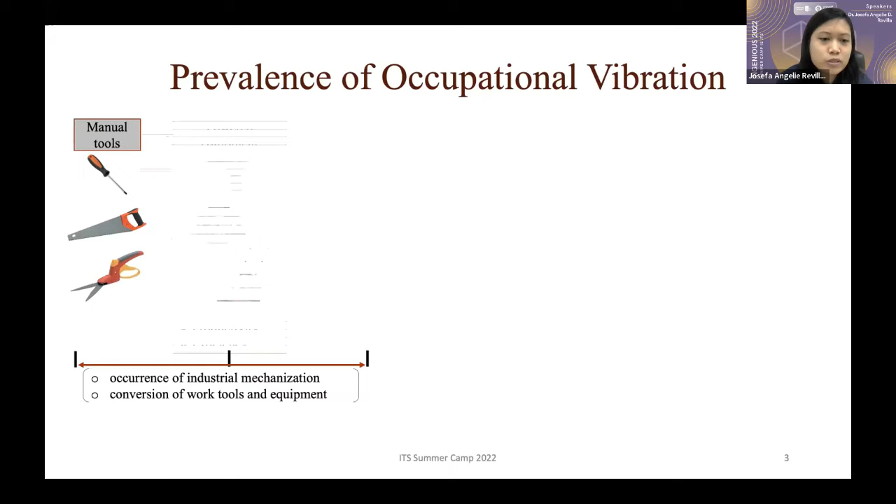We all know that in the early days, we were all using manual tools. However, due to industrial mechanization, these manual tools have been converted to mechanized or powered equipment, primarily because we want to improve productivity and efficiency.

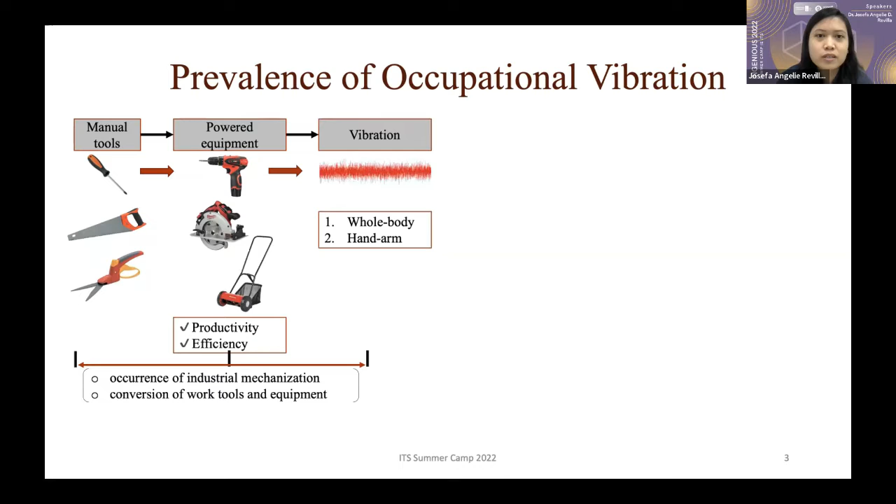This is not just present in the agricultural sector. This can also be observed, and is very prevalent even in the manufacturing industry. However, these powered tools create vibration that can be transmitted through your whole body or to the hand-arm system. So my focus will be on the hand-arm system.

The amount of transmitted vibration is not just influenced by the characteristics of the vibration source, it is equally influenced by the hand-arm biomechanics of the operator, meaning how strong you grip the handle, what posture you are imposing, something like that. And in the long term, continuous exposure to high levels of vibration...

Given the extreme grip exertion and awkward posture, these can all lead to what we call hand-arm vibration syndrome. This can affect peripheral neuropathy, or can lead to peripheral neuropathy, musculoskeletal disorder, and vasoconstriction.

My main focus will be on the musculoskeletal disorder. These can lead to permanent disabilities. So the critical stage when assessing the effect of vibration will be on the onset, or during the short-term exposure.

So in the succeeding presentation, you can see that our focus will be on the short-term exposure to hand-arm vibration, because we consider that this is the critical stage wherein we should be able to determine or discover the onset of HAV symptoms.

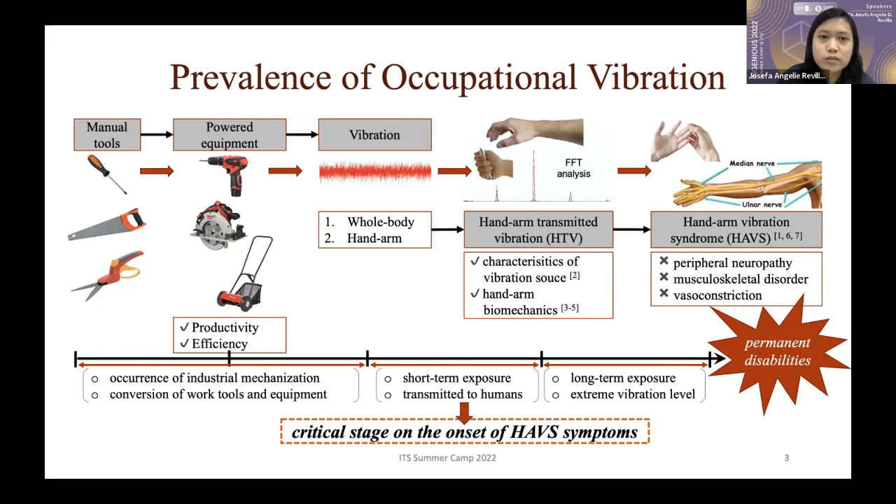Okay, so occupational vibration here in the Philippines. Agriculture is one of the main sources of livelihood here in the Philippines. In fact, 25 to 30% of the labor force is under this agricultural subsector. 17% of the 30 million hectare land area are arable land used for farming.

And one of the top agricultural commodities is rice. When planting or farming rice, usually the farmers need to first prepare the land. As you can see in the picture here, you first need to prepare the land before you can actually plant the rice or the seeds.

Let me show you how land preparation is being conducted. Before that, let me inform you that one of the main agricultural machinery being used to prepare the land for farming is the hand tractor. So this is an example of a hand tractor.

This is usually pushed forward at a slow pace. Sometimes it can be lifted or pushed downward depending on the quality of the soil. So let me show you a short video clip on how a hand tractor is being operated.

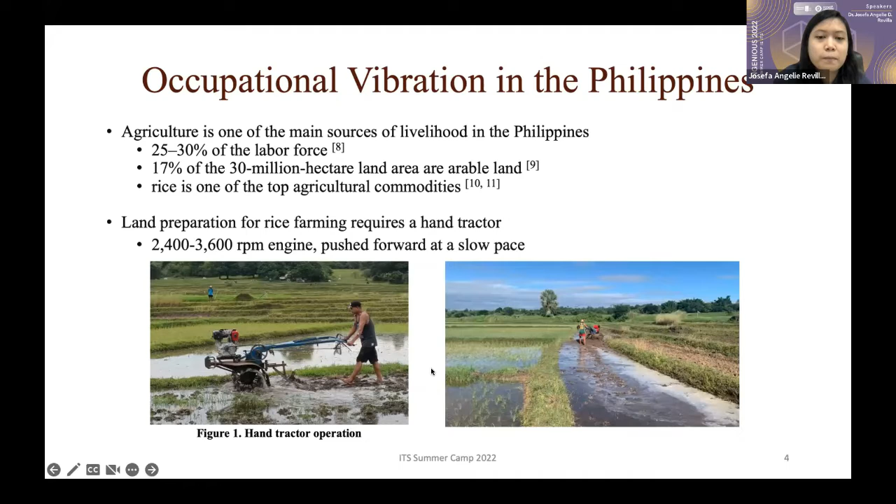Now here are some of the research that we have conducted here in the department that relate to transmitted vibration in physiological responses. As I mentioned earlier, in previous years we were more focused on hand-arm transmitted vibration from a hand tractor and how it can be reduced. So here are some of our research related to that.

We mainly focused on hand-arm transmitted vibration early on, previously, because of some limitations in the equipment that we have. But eventually, we were able to also focus on the physiological responses to vibration, only in a laboratory setup.

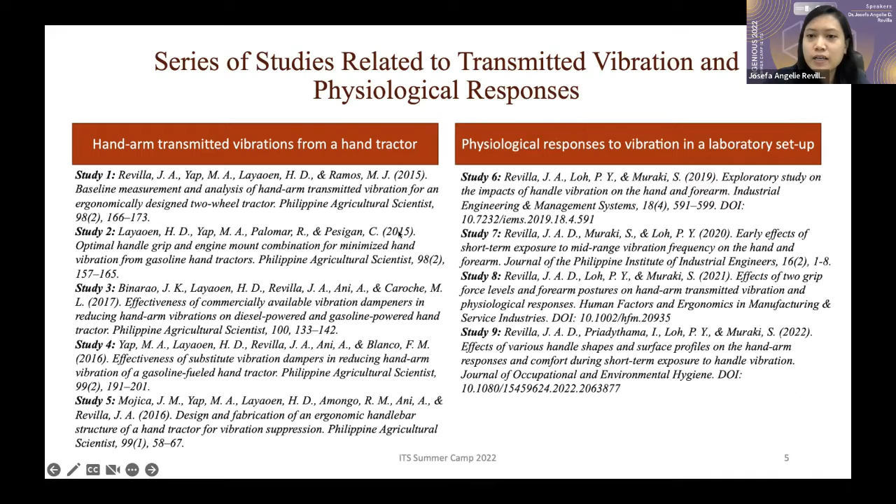To give you a brief background, in our department we have been involved in a series of studies that investigated the amount of transmitted vibration from a hand tractor to the operator. So in the early studies, only HTV, or hand-transmitted vibration, was investigated.

These research efforts were initiated by our previous department chair, Assistant Professor Layaoen, and one of our faculty members, Engineer Yap. Together with some of our faculty members and students, we were able to create a series of studies that established a good foundation on the knowledge about hand tractor vibrations and how they can be minimized.

This was seen back then, given a few limitations in our resources, such as availability of ergonomic equipment, specifically the electromyography, we were not able to assess the physiological effects of hand-transmitted vibration to the operator. So this was seen as a significant opportunity and area for further research. Hence, I used this as part of my PhD dissertation.

So with a wide range of available ergonomic equipment in my university in Japan, I was able to focus and consider the factors that can affect the physiological responses of operators from hand-transmitted vibration.

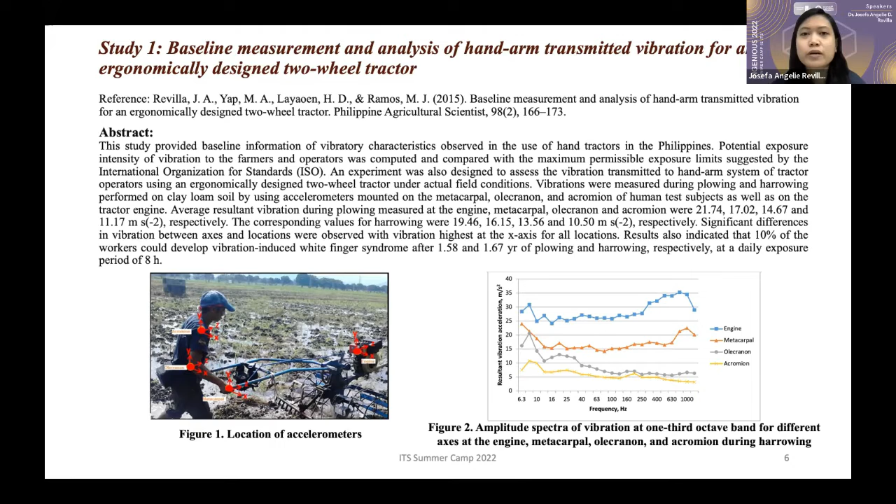During the hand tractor operation, the vibration amplitude from the 4 locations—the engine, hand, elbow, and shoulder—were measured using the triaxial accelerometers, and they were recorded using the data logger system attached to the accelerometer. Eventually, the recorded data was exported to MS Excel, and they were analyzed using Minitab and StatFit.

To give you the highlights of the results, we figured that the amount of transmitted vibration from the hand tractor engine to the hand, elbow, and shoulder exceeded the allowable threshold value. They all exceeded the exposure action value and exposure limit values, which are the two safe values required by the international standard.

With the vibration values presented, it is possible that 10% of the operators can acquire vibration white finger, which is quite similar to hand-arm vibration syndrome, after 1.5, 1.58, and 1.67 years of plowing and harrowing respectively, given that they work for 8 hours a day.

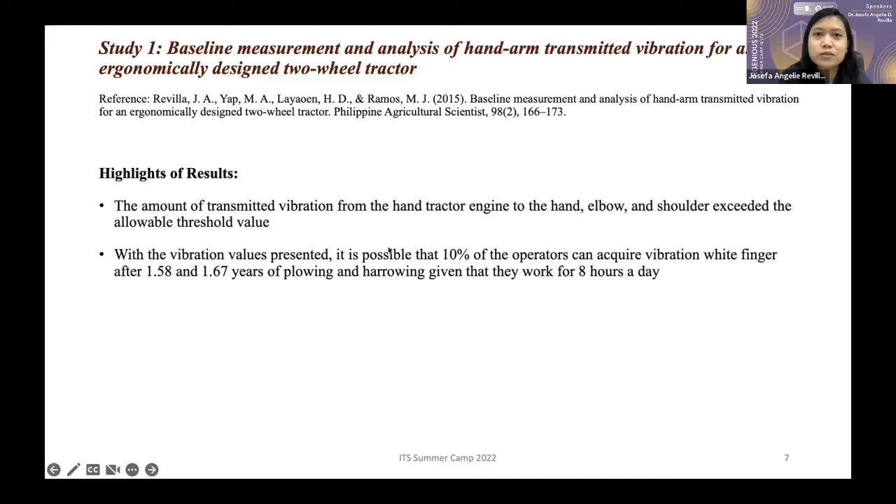Given this result, the findings we found here are actually very significant, and the results led to various researches and studies which aim to minimize or reduce such vibrations discovered here. Now, the second study focused on reducing the amount of transmitted vibrations.

Unlike the first study, which was conducted in an actual field operation, this study was conducted in a laboratory setup, an outdoor laboratory setup. One male subject was chosen in the study. His skills and familiarity in handling the tractor were not of primary consideration, since the experimental task only required him to hold the hand tractor in idling operation.

Various handle grips and engine mounts available in the Philippine market were identified through market research and survey. From this research and survey, the results were further categorized only among those which can fit the handlebar of the existing hand tractor that will be used in the study. A few handle grips were then determined, including the BMX, mountain bike, motorbike, and tennis rubber tape grips. All were found to fit the handle diameter of the hand tractor.

Meanwhile, three engine mount brands were considered, namely Isuzu, Suzuki, and Mitsubishi. The tractor used in this study was a gasoline-powered tractor. There were 3 replications for each trial, and each replication lasted for about 5 minutes.

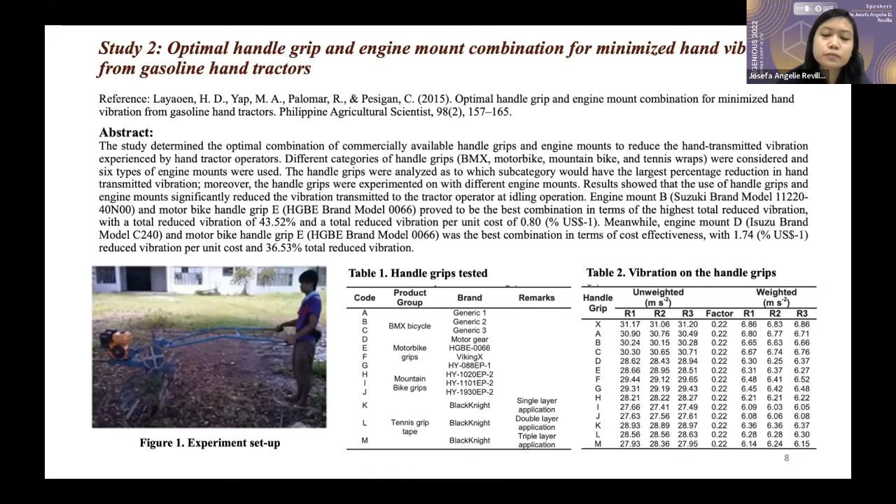the reduced vibration per unit cost. To give you the highlights of this study, during idling operation it was found that having a handle grip and engine mount significantly reduced the amount of vibration transmitted to the operator. Although the addition of the handle grip and engine mount entails an increase in cost, the amount of transmitted vibration may be reduced by approximately 44%.

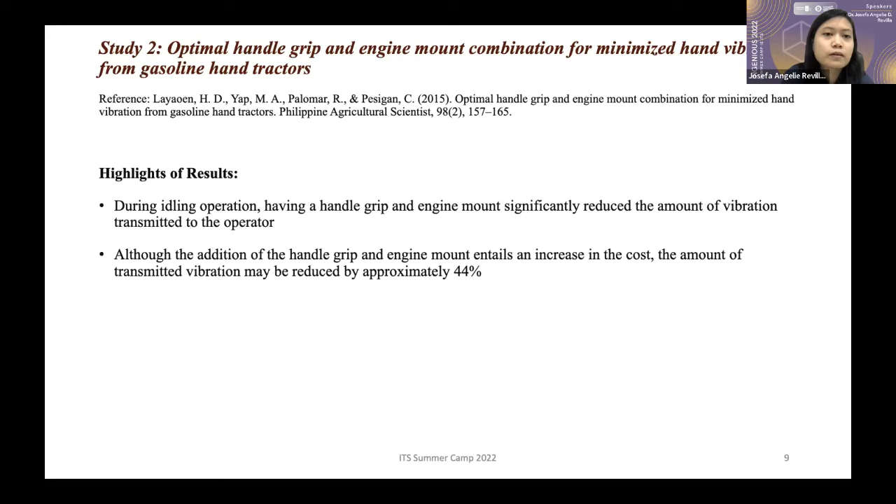The next study focused on comparing the effects of having a diesel-powered tractor versus a gasoline-powered tractor. In the first study, the hand tractor used was diesel-powered. The second study considered a gasoline-powered hand tractor. The third study focused on how commercially available vibration dampeners, specifically handle grips and engine mounts, can reduce the amount of vibration on both diesel-powered and gasoline-powered hand tractors.

Similar to study 2, it was conducted in the laboratory grounds of the university with one male subject chosen. The same type of commercially available handle grips and engine mounts were used. The tractor used was the same two-wheel tractor as in study 2, but this time two engines were used, one diesel-powered and one gasoline-powered.

Engine 1 is a diesel-type engine, the Kama KM170F, and engine 2 is a gasoline-type engine, the Kenbo KB 5.5 engine. The two engines were interchangeably placed on the tractor for testing.

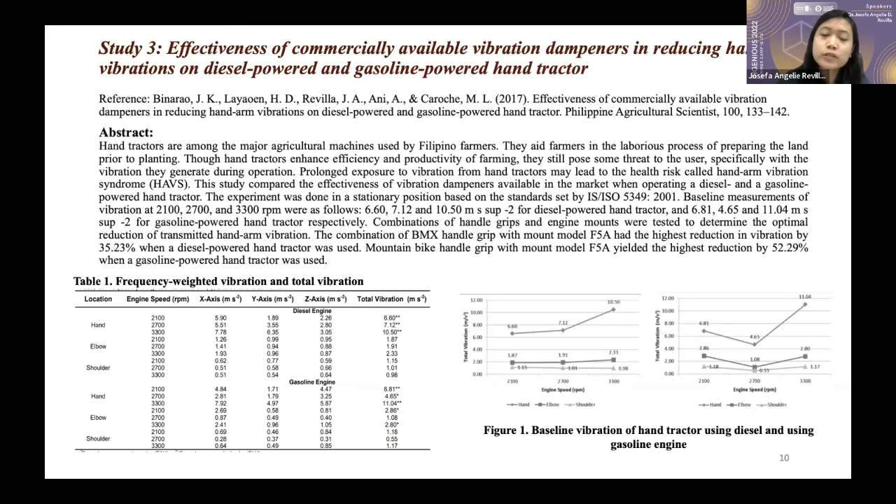Three accelerometers were again placed on the hand, elbow, and shoulder of the operator to determine the amount of transmitted vibration. This study presented the comparison between the transmitted vibrations from gasoline and diesel-powered hand tractor engines. During idling operation, the vibration from gasoline and diesel-powered engines did not differ significantly.

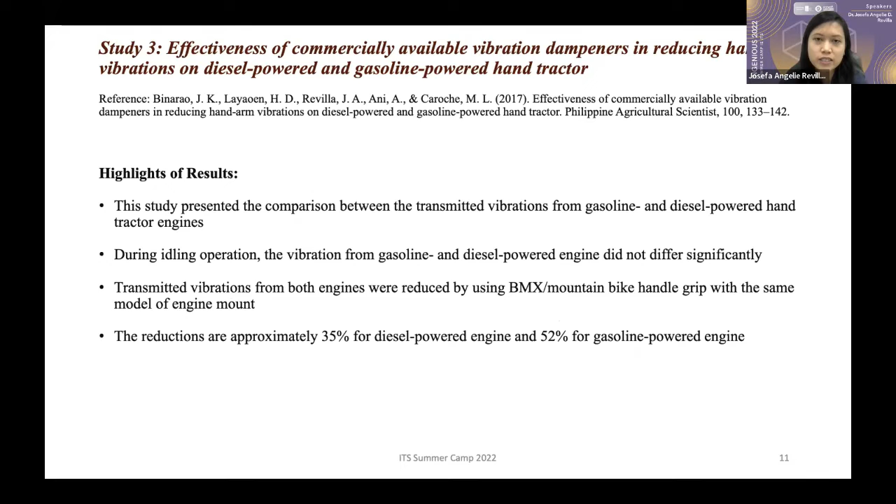Transmitted vibrations from both engines were reduced by using BMX and mountain bike handle grips with the same model of engine mount. The reductions were approximately 35% for the diesel-powered engine and 52% for the gasoline-powered engine.

The next study again focused on using handle grips, but this time we tried to investigate substitute handle grips and substitute engine mounts.

Because of the cost to acquire the commercially available handle grips and engine mounts presented in studies 2 and 3, we considered the capability of the farmers and operators to actually purchase these additional materials. So if they do not have enough money, at least they have substitute materials they can use to minimize or reduce the amount of transmitted vibration.

That became the focus of the study: to determine and introduce different substitute vibration dampeners, such as handle grips and engine mounts, which can also reduce the amount of transmitted vibration.

This study followed the methodology of study 3. The main distinction is that this one used substitute materials instead of commercially available materials because of the cost it would entail to acquire the ones in the market. As mentioned earlier, we considered the capability of the farmers to buy commercially available materials, and if they do not have the capacity to do so, they can just use substitute materials.

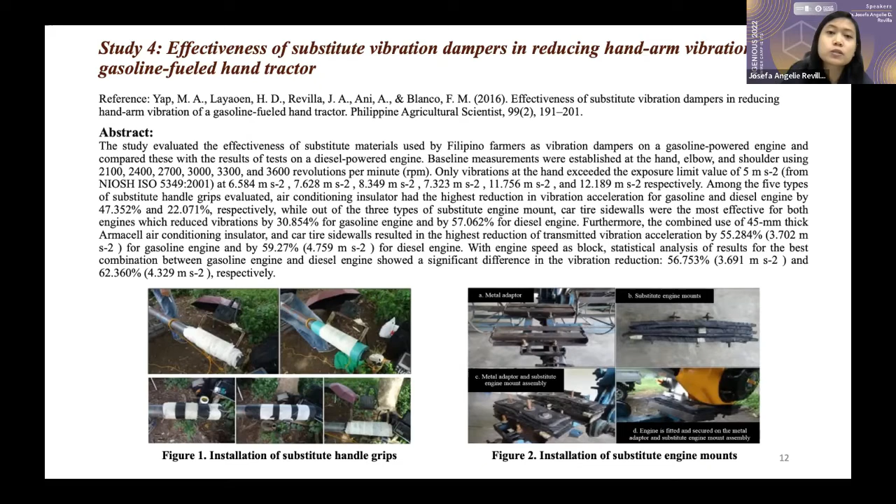To summarize the results, given the entailed cost of acquiring commercially available handle grip and engine mount materials, it is suggested to explore the application of substitute materials. During idling operation, installing a handle grip made of air conditioning insulator combined with a car tire sidewall as engine mount resulted in approximately 55 to 60% reduction.

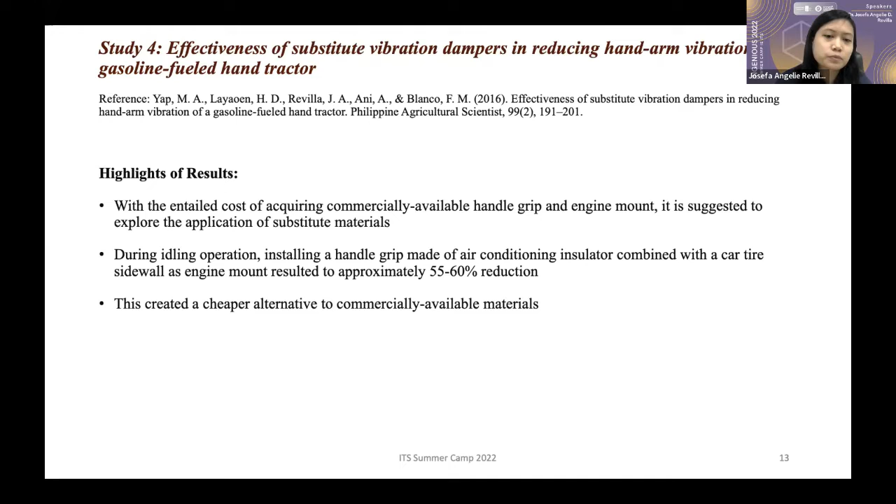Given studies 1 to 4, I think we already explored the feasibility of having handle grips and engine mounts. So the next study focused on a more proactive approach, wherein we tried to redesign and fabricate a different handlebar structure for a hand tractor, which can suppress or minimize the amount of transmitted vibration.

This study investigated 4 handlebar structures: the original one, 2 designs benchmarked on the initial design of Bureerat and Kanyakam in 2007, and a 4th design, an improved handlebar design which came from the good characteristics of the first 2 designs from Bureerat and Kanyakam.

So there are essentially 4 handlebars that were tested here: the original one, the 2 designs taken from or benchmarked from the study of Bureerat and Kanyakam, and an improved handlebar structure, taking all the positive characteristics of the 2 initial designs.

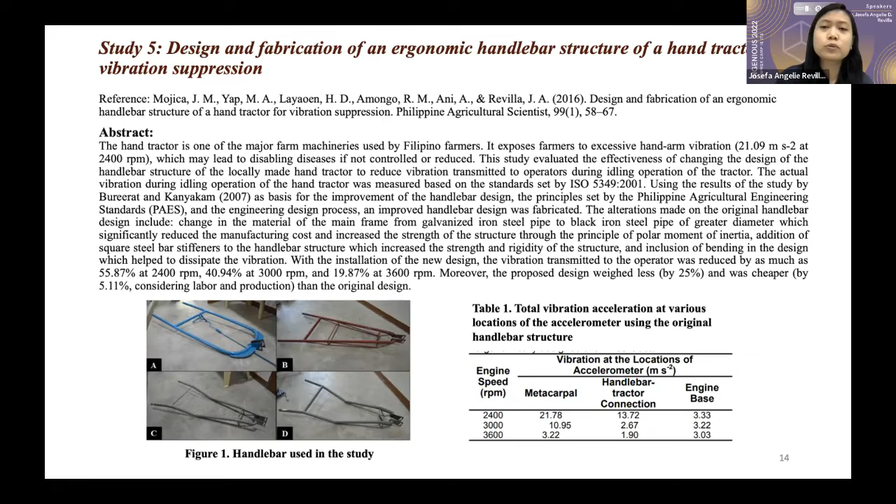The data were analyzed and compared using the analysis of variance, and Tukey's method was used for multiple comparison.

To give you the highlights of the results: the design was benchmarked on the study of Bureerat and Kanyakam, the principles stipulated in PAES, and the engineering design process. With the new handlebar design, the amount of transmitted vibration from the engine to the operator was significantly reduced. The new design is also more economical and has a lighter weight than the original handlebar design.

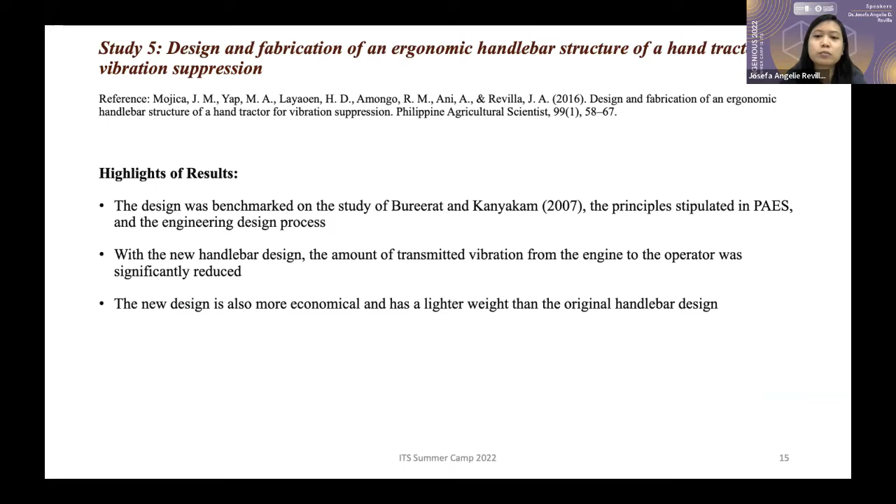The succeeding studies will be focusing on the physiological responses of the operators from hand-arm transmitted vibration.

The first study is about an exploratory study on the impact of handle vibration on the hand and forearm. As mentioned in my previous discussion, the general limitation of the earlier studies, the first 5 studies, was that they were not able to assess the physiological responses of the subjects. Only the level of vibration and how it can be reduced was considered.

Hence, the following research focused on the consideration of this important matter, which is the physiological responses of the operators. In this first study, 7 young male adults were recruited without any long-term exposure to vibration and have not had any recent injuries in the hand-arm area.

The vibration source, as you can see here, is a custom-made vibration table installed with a fabricated handlebar structure that simulated the level of vibration exhibited by the actual tractor and the hand-arm posture of the operators when using the machine or the hand tractor.

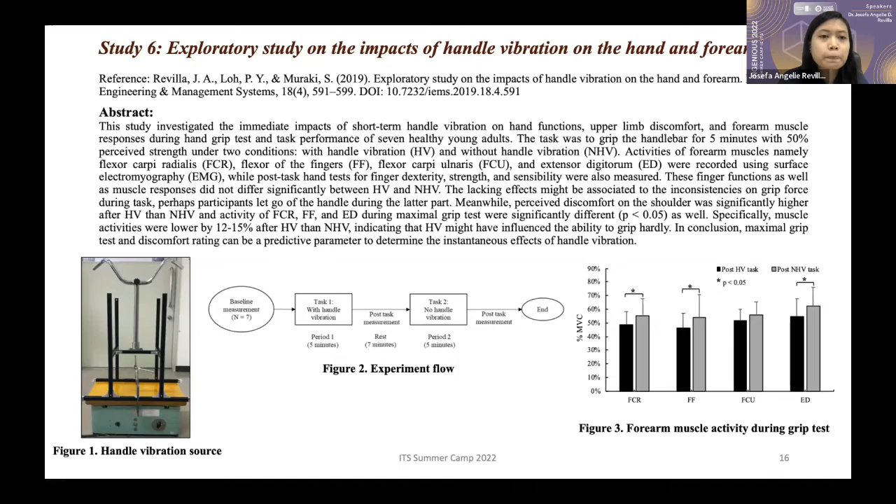To summarize the results, in this study we were not able to monitor the level of grip exertion during task performance. With unmonitored grip exertion during a 5-minute handle vibration exposure, the effects on forearm muscle activities and various hand functionality tests were not observed.

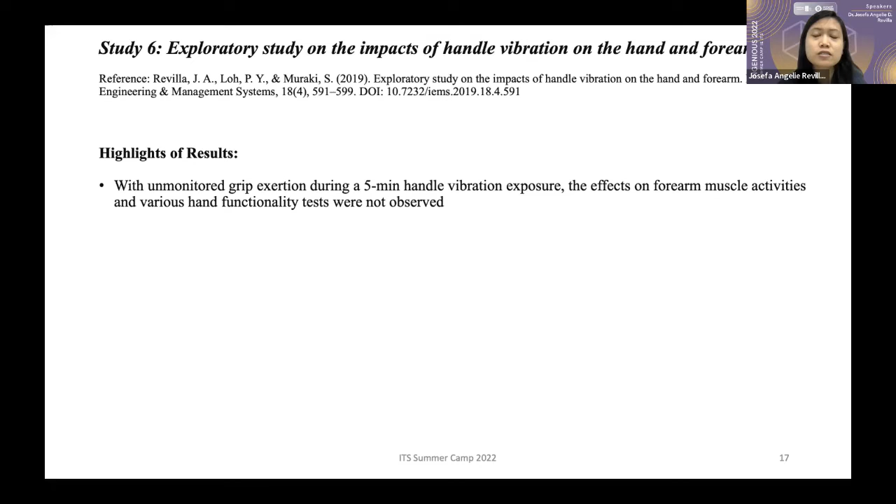This led to the next study wherein we monitored the level of grip exertion during task performance, when the operator is handling the vibrating handlebar. The next study is the early effects of short-term exposure to mid-range vibration frequency on the hand and forearm. In this study, 14 young healthy male adults were recruited with the same inclusion criteria as the previous study.

With the same inclusion criteria as study 6, the same vibration source was used, only with minor modification or improvement on the handlebar attachment frame. The same indoor laboratory condition was applied, and the pre-task and post-task tests include grip strength test, pinch strength test, finger sensitivity test, finger dexterity test, and subjective discomfort rating.

The main task is to hold the handlebar for 5 continuous minutes while forearm muscle activities and heart rate are being measured. This time, the level of grip exertion during task performance was constantly monitored.

As you can see in this figure, we provided a computer monitor in front of the participant to assist him in monitoring the level of grip exertion that he is actually exerting during the 5-minute task performance. He was instructed to maintain his exertion at 30% of his maximum grip, as you can see in this figure. His grip exertion should be within this level.

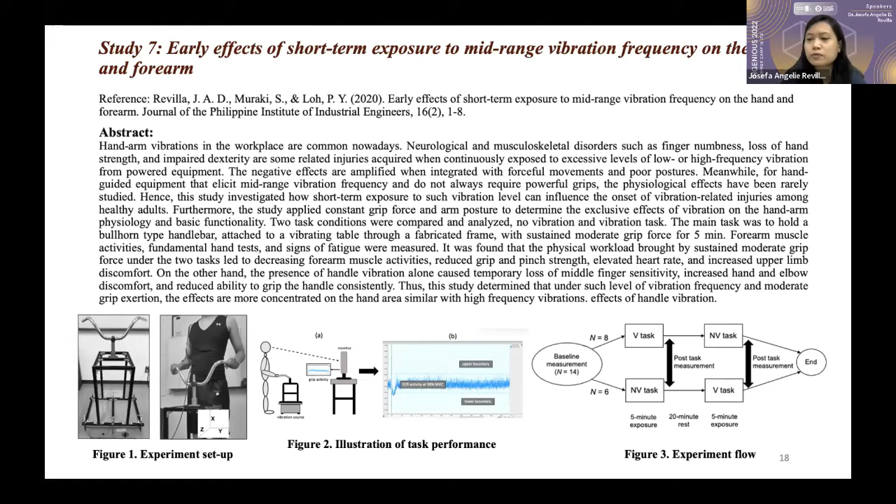We have here a boundary, an upper bound and a lower bound, wherein his grip exertion should be maintained within these bounds. Similar with study 6, there are 2 task conditions: first is without the presence of handle vibration, and second is with handle vibration.

To summarize the results, now with constantly monitored grip exertion during the 5-minute handle vibration exposure, the effects on forearm muscle activities and various hand functionality tests were evident. The effects of sustained grip exertion for 5 minutes alone led to decreasing forearm muscle activities, meaning tired muscles, reduced grip and pinch strength, elevated heart rate, and higher perceived discomfort along the upper limb. Now combining this with handle vibration, finger sensitivity and the ability to grip the handle consistently were also reduced.

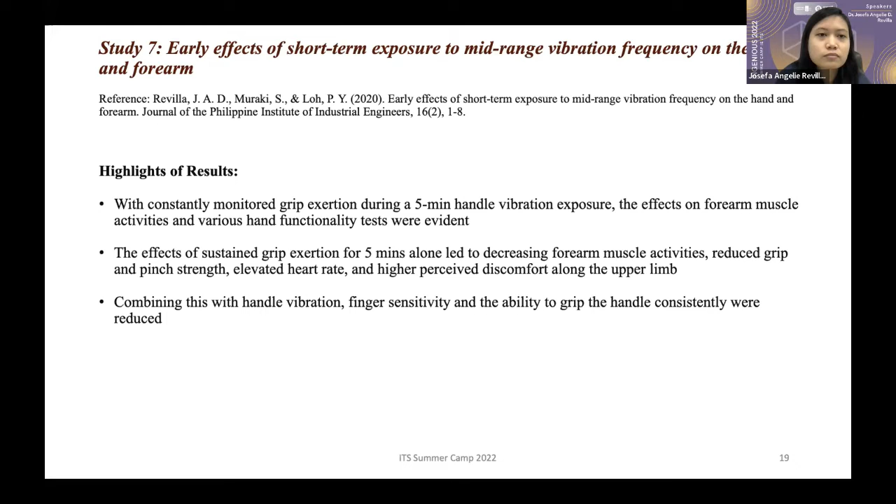The next study dwelled deeper on the specifics of the biomechanical factors that can affect the amount of transmitted vibration. These include the level of grip exertion and forearm posture. This study is about the effects of 2 grip force levels and forearm postures on hand-arm transmitted vibration and physiological responses. In here, 16 young male healthy adults were recruited.

Same inclusion criteria were used. Same vibration source and handlebar attachment frame was used. In here, 2 handlebar structures were tested. The first one is a straight handlebar, as you can see in this figure, which encouraged a pronated forearm posture.

The second is the same bullhorn type handlebar structure that encouraged a neutral forearm posture. The level of grip exertion was also categorized as mild, which is 10% of the participants' maximum grip, moderate, 30% of the participants' maximum grip, and hard, 50% of the participants' maximum grip.

The main task is to hold the prescribed handlebar, either the straight one or the bullhorn type, using the prescribed handle grip exertion for 5 minutes while vibrations at baseline on the handle, wrist, and elbow are being measured, as well as the forearm muscle activities and heart rate.

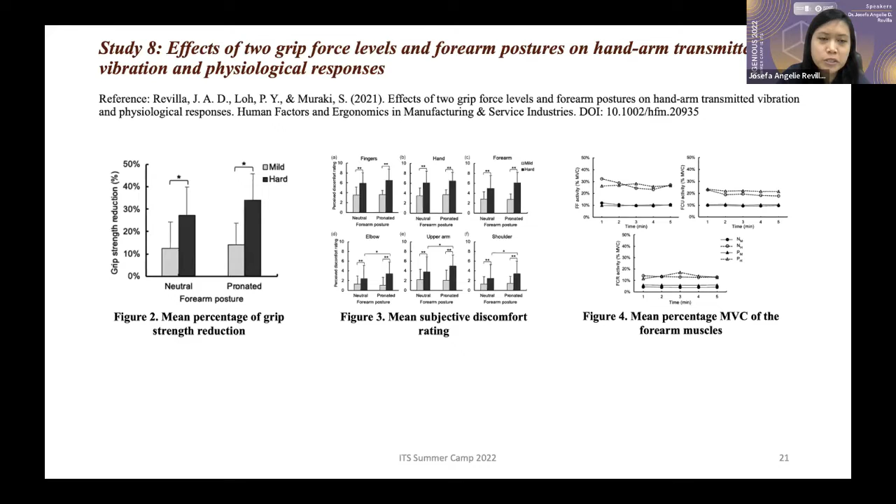To highlight the result: when a certain task involves strongly gripping a handle, the forearm posture or the handlebar structure must promote a natural or neutral forearm posture to minimize the physical workload brought by the presence of vibration. When a task involves mildly gripping a handle, meaning about 10% of your maximum grip, then either a pronated or neutral forearm posture is okay or recommended.

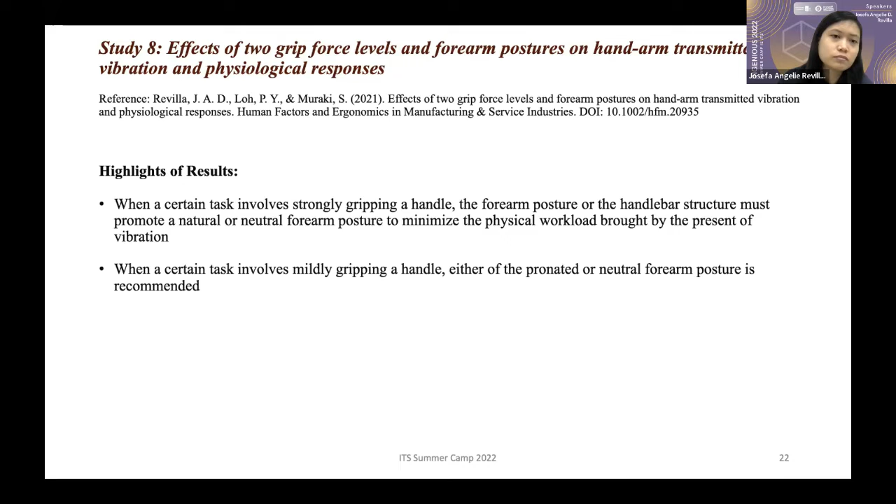Thank you. The last study that I will be sharing will be the effects of various handle shapes and surface profiles on the hand-arm responses and comfort during short-term exposure to vibration.

Let me explain why this study was established. After giving a good foundation on the physiological impact of vibration to the upper limb, this study aimed to investigate how these negative impacts can be mitigated, specifically through the application of customized handle grips. Previous studies proved that having a handle grip and engine mount can reduce the amount of transmitted vibration. Knowing that, can this also reduce the amount of physiological impact to the operator?

Very briefly, let me show you the handle grips that I used. I used 6 handle grip designs with 3 different shapes: circular, double frustum, and elliptic. I also considered 2 surface profiles, a smooth and a patterned surface.

The main task is to hold the vibrating handle for 3 minutes, while vibrations at baseline, handle, wrist, elbow, and forearm muscle activities are measured. Pre-task and post-task tests were also performed, including grip strength test, finger sensitivity test, and subjective discomfort and grip comfort rating. Paired t-test, Wilcoxon sign rank test, two-way repeated measures ANOVA, and Friedman test were the statistical tests used in the study.

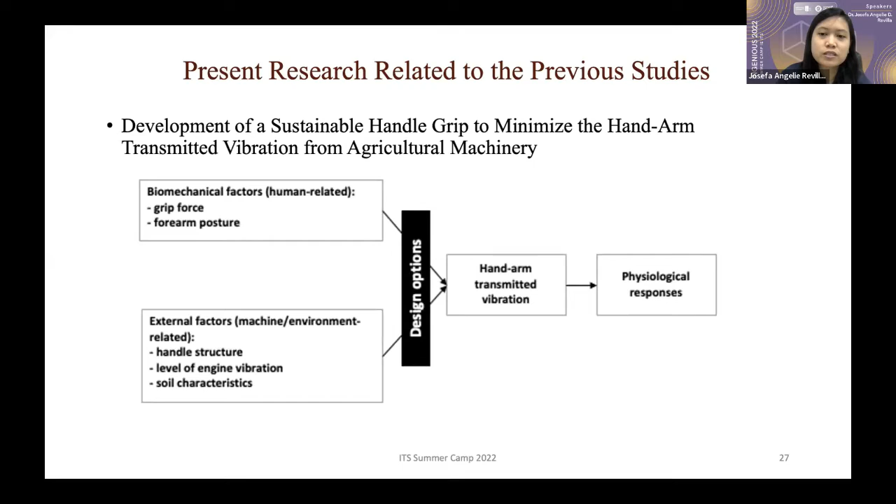These are just the factors that were established which can affect the amount or level of vibration transmitted to the operator, as well as their physiological responses. So the main objective of the present research is to develop a sustainable handle grip that can minimize the amount of hand-arm transmitted vibration from agricultural machinery used in the Philippines during actual field operation.

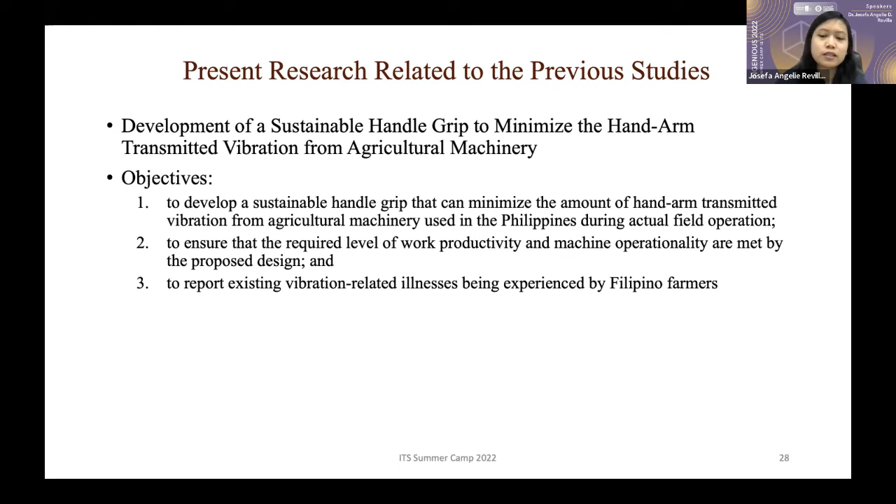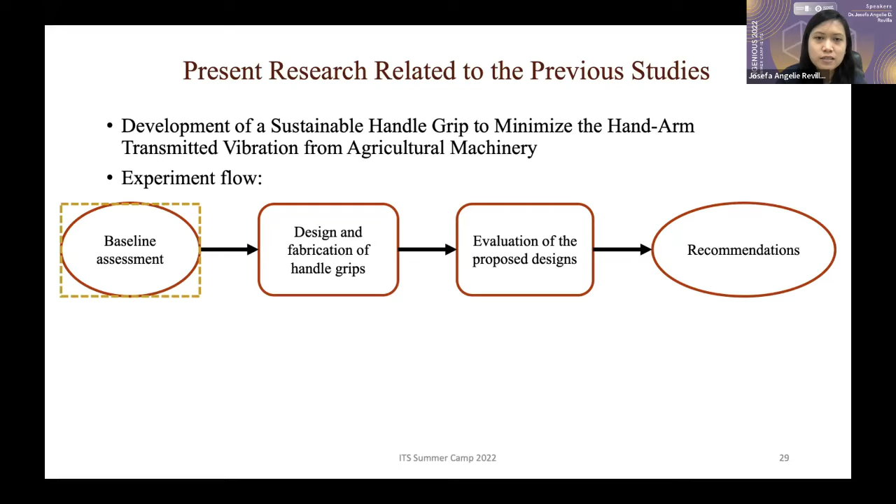That's the main objective. Let me show you our experiment flow. First is to create a baseline assessment of how vibrations are being transmitted during actual farming operation, and what physiological responses operators have to such levels of vibration. The next step is to design and fabricate sustainable handle grips, then evaluate the proposed designs, and finally create recommendations.

This is what we did when establishing the baseline measures, specifically the baseline measures of transmitted vibrations, muscle loading, existing hand functions, and baseline assessment of discomfort and comfort of actual farmers and operators of farm machineries.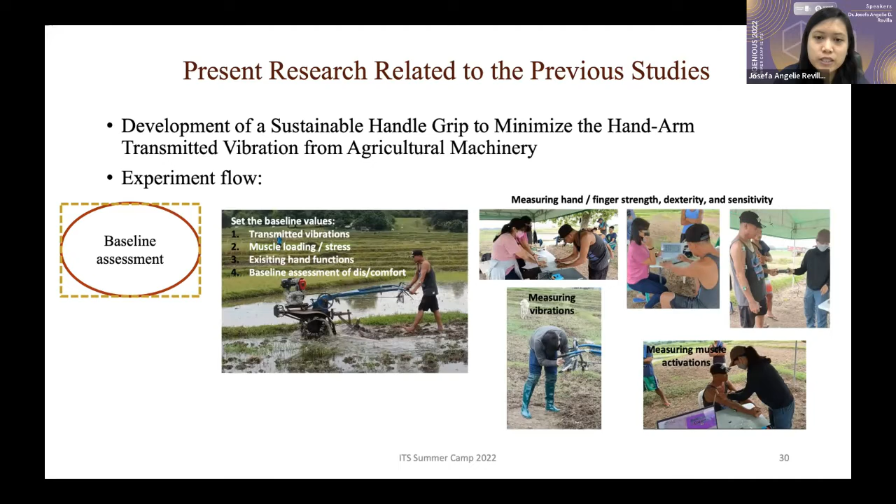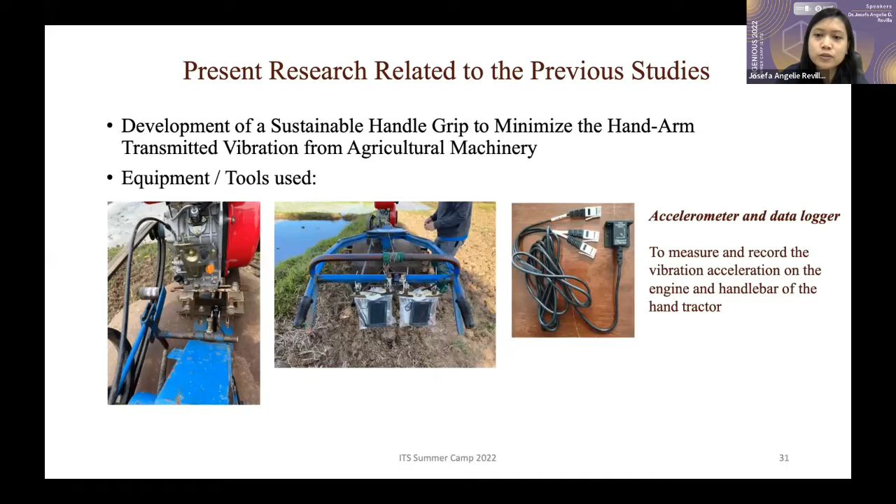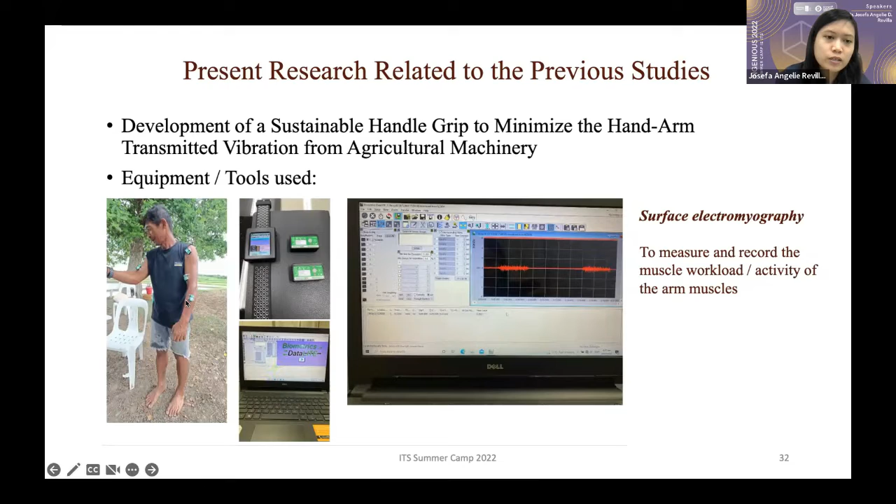Let me run down the tools that we used. We used the same accelerometer and data logger to measure and record the vibration acceleration on the engine and handlebar. We used surface electromyography to measure and record the muscle workload or activity of the forearm and arm muscles—attaching the surface EMG on the forearm, biceps, elbow, and shoulder. We also used a hand dynamometer to measure and record maximum grip and pinch strength.

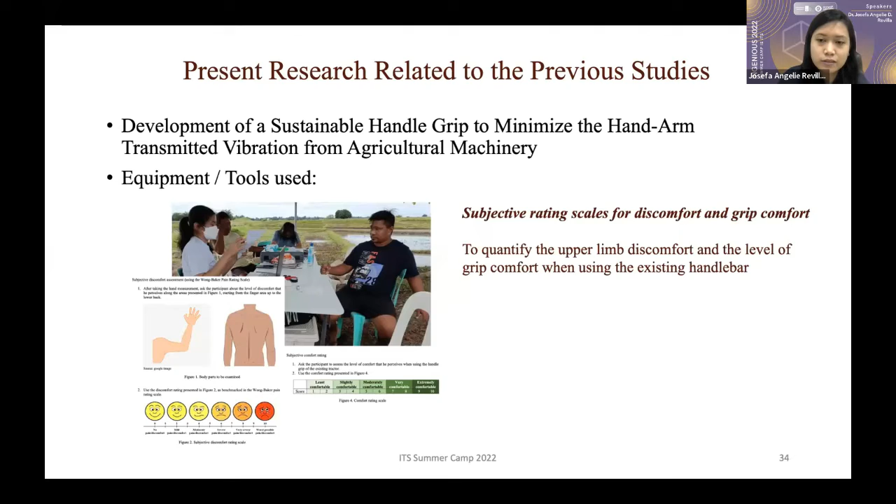We assess subjective ratings using subjective rating scales for discomfort and grip comfort. This is to quantify the upper limb discomfort and the level of grip comfort when using the existing handlebar. We also measured blood pressure to quantify cardiovascular health of the farmers.

Since in this research we are considering farm operators, unlike the previous studies wherein I considered young healthy male adults.

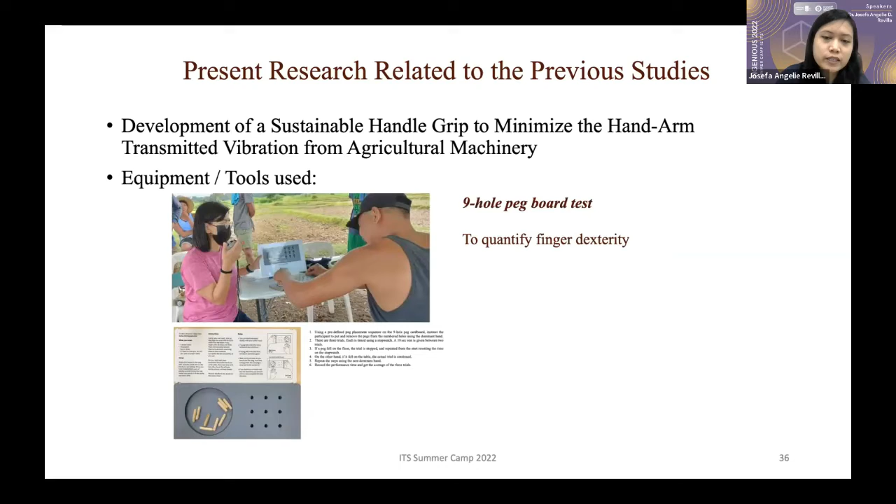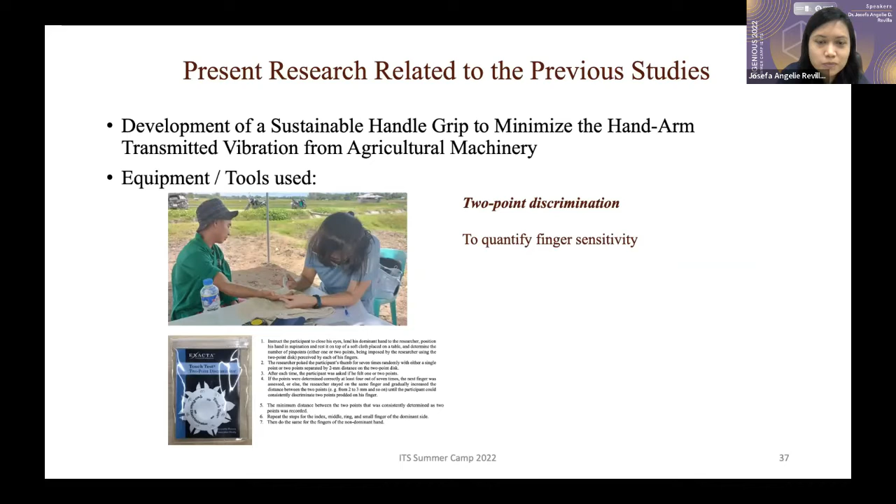We use the 9-hole pegboard test to quantify finger dexterity, and 2-point discrimination to quantify finger sensitivity. The main goal here is to develop a sustainable handle grip. We are still in the early stages of the research, so we are now finalizing the baseline assessment. We have yet to design the handle grip, we have yet to fabricate it, but this part of the research will be our next focus after we assess the initial results.

Thank you, it is my pleasure to share our ergonomic progress here in the department, specifically now that we are in the Industry 4.0 era where manual tasks are being converted or replaced by powered ones. Nevertheless, it is equally important to investigate how these newly developed equipment can aid productivity and efficiency during operation. Thank you all for listening.